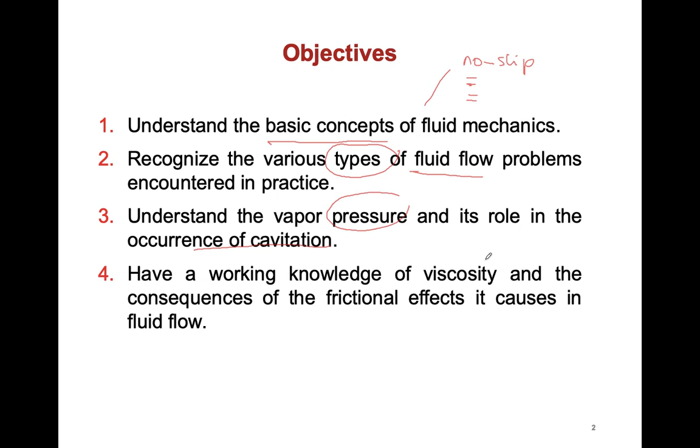So the first fundamental topic that we need to learn here is the no-slip condition. This is number 1, the fundamental concept. This no-slip condition is affected in experiments already done on an aerofoil or wing, aeroplane wing. This is what we call the cross sectional.

So to understand this, let's look here. We have one condition, or we form one situation where the flow here has the same velocity. So here all having the same velocity. But the velocity here actually has not reached the plate yet. After the velocity reaches the plate, the velocity before this, which was uniform or the same magnitude, will be having a different magnitude.

So at the bottom, the velocity will become 0 because of the no-slip condition. What is the no-slip condition? No-slip condition is we assume the fluid is having friction. If we assume it's a slip condition, that means the velocity here and the velocity here is the same, because in a slip condition, the particle nearest to the plate slips, meaning it's not having frictional effect.

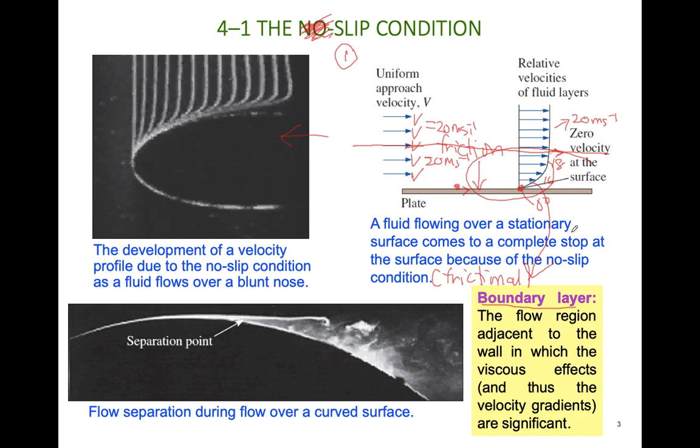Okay, so the second criteria or second fundamental knowledge in fluid mechanics is the viscous and inviscid region. This is what we call the extended explanation of the no-slip condition.

So if we see here, this is an effect from the slip condition, and this is an effect from the no-slip condition. Here we call this the same velocity from the mainstream.

So this is the viscosity effect, or we call it the viscous flow region. So if the velocity here is not affected by friction, we call it the inviscid flow region. If we look back here, viscous flow is where the frictional effects are significant. So here is the frictional effect, the flow affected by friction.

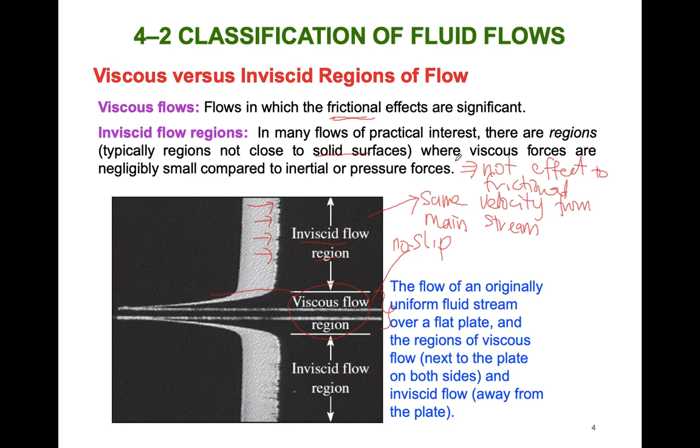Okay, so that is the second fundamental knowledge. So the third is the straightforward external and internal flow. External and internal flow, this one is straightforward. So internal flow, the flow will be completely bounded between the surfaces.

So if pipe flow comes here, this one is an internal flow, where the flow is bounded by the surface. This surface can be anything, can be square, can be anything, triangle. As long as the flow is bounded by the surface, we call it internal flow. And this one, external flow, is unbounded. For example, this one. This one we call external flow.

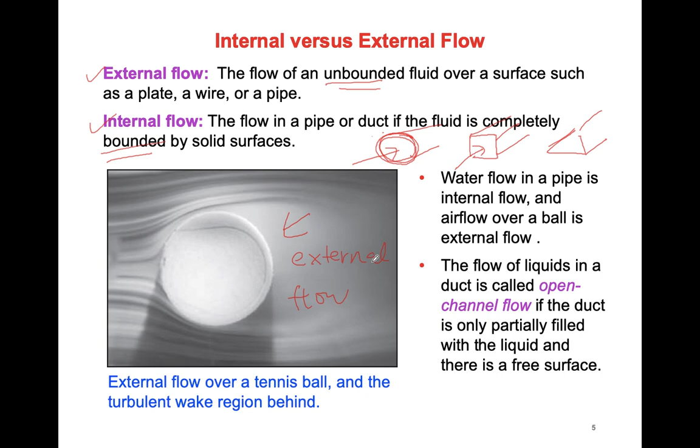Okay, so today we will learn more. Hari ini kita akan tengok lebih kepada definition. Sebab ini adalah main. Kalau you tak faham definition, that means you tak boleh nak understand the real situation nanti bila kita tengok chapter 6.

So this is compressible and incompressible flow. So incompressible means the density is constant. For compressible, the density is not constant. What does constant or not constant mean? So if we have the flow, and the velocity of the flow is, for example, 20 meters per second, we need to calculate what the Mach number is for 20 meters per second.

So here is the formula for Mach number. Speed of flow is 20, over speed of sound, this one you need to check. What is the speed of sound? Usually we can call it 300. So if we calculate here, the value is 0.2, for example. For incompressible flow, we suggest the condition is a Mach number of 0.3 and below.

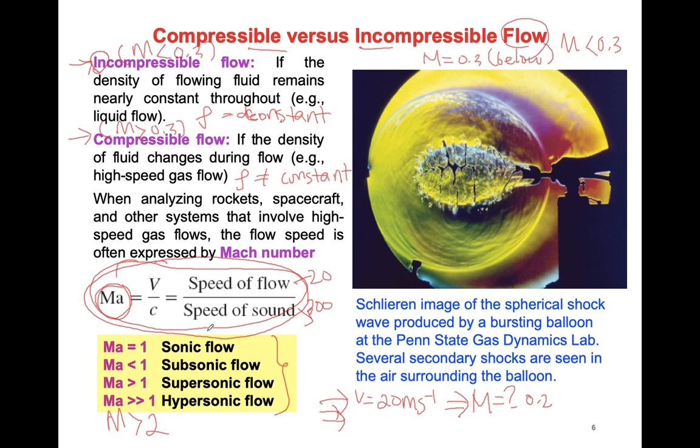This one is only the notation. So if Mach number equals 1, the flow is sonic flow. If Mach number is less than 1, the flow is subsonic flow. If Mach number is more than 1, the flow is supersonic flow. Usually, Mach number greater than 2 is hypersonic flow. Okay, this one is compressible and incompressible flow.

So the next fundamental is laminar and turbulent. What is laminar and what is turbulent? I think you had this in our experiment to determine laminar and turbulent. So laminar and turbulent are types of flow. If the flow is laminar, the definition is highly ordered fluid motion characterized by smooth layers of fluid. The flow of high viscosity fluids such as oil at low velocity is typically laminar. The main words here are motion characterized by smooth layers of fluid.

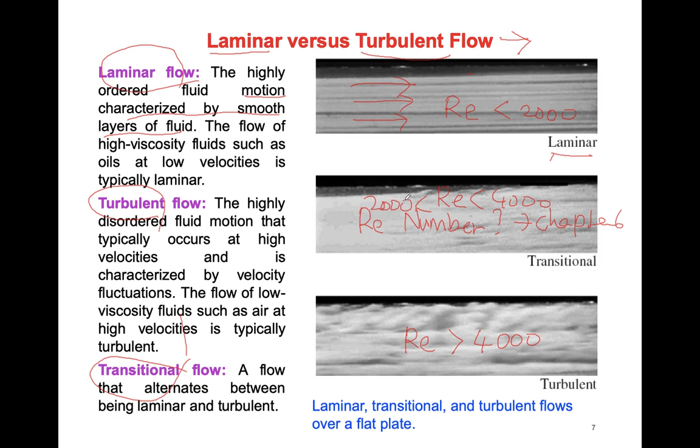So to characterize laminar, turbulent or transition, we have one formula, the Reynolds number. We will see the Reynolds number in detail in chapter 6. If we calculate the Reynolds number less than 2000, we call it laminar. If the Reynolds number is more than 4000, it is turbulent. For transitional, the Reynolds number is less than 4000 and more than 2000. This one we call transition.

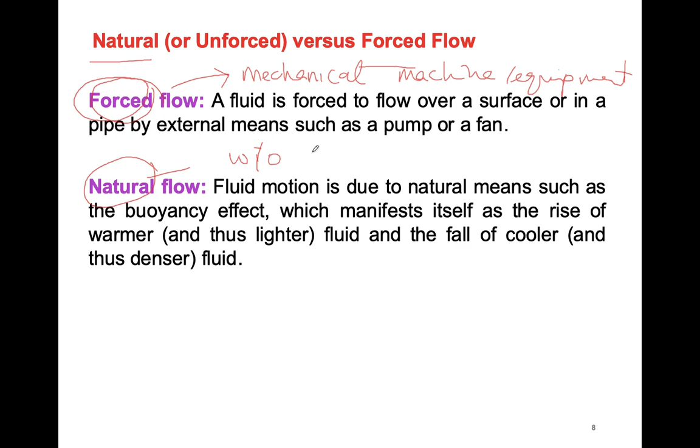So this one is straightforward also. We need to know the flow condition, either forced flow or natural flow. Forced flow is flow using a mechanical machine, mechanical pump, or mechanical equipment. Natural flow is without using mechanical equipment. So that's all. So if we blow, the condition is natural flow because it is not using mechanical equipment.

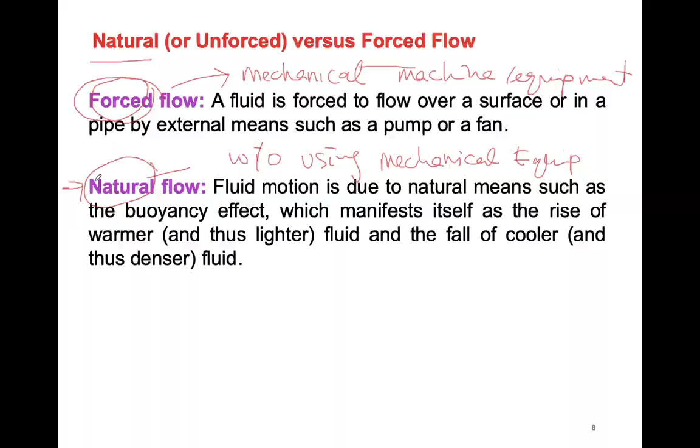Okay, so then the next fundamental here is a buoyancy effect. Here we need just to capture the force, fundamental force versus weight. Oh, you cannot see here. Okay, this one is the force versus weight.

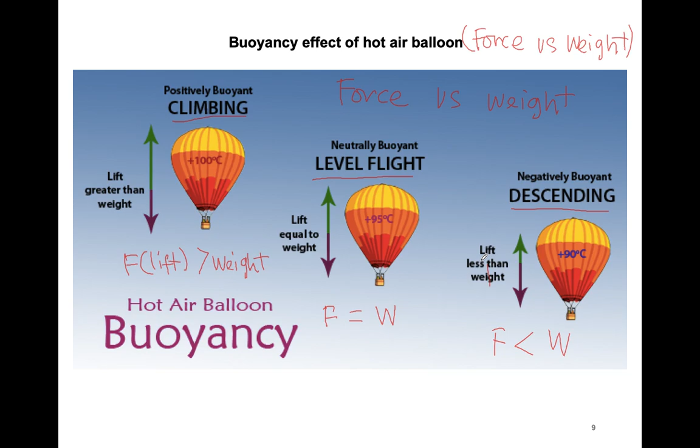Okay, so if the lift force is greater than weight, that will be the climbing condition. If the lift force is equal to the weight, that means level flight. If the force is less than weight, that means weight is much greater, there will be the descending condition. That's only the fundamental here.

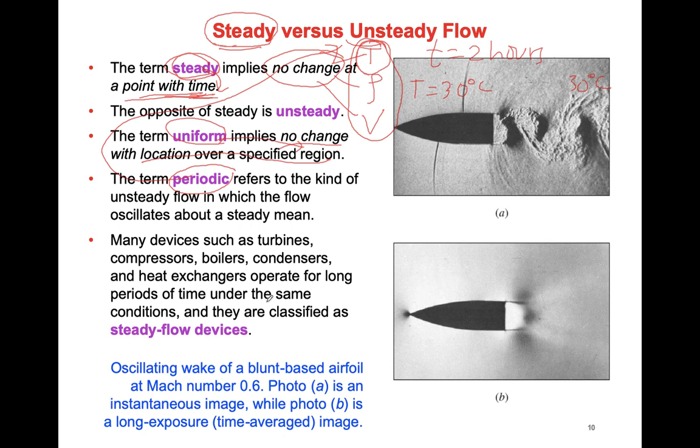Okay, periodic refers to a kind of unsteady flow, which means the flow oscillates about the steady mean. So this one is a subset of unsteady. Many devices such as turbines, compressors, boilers, condensers, heat exchangers operate for a long period under the same condition. So these devices we usually design as steady flow devices.

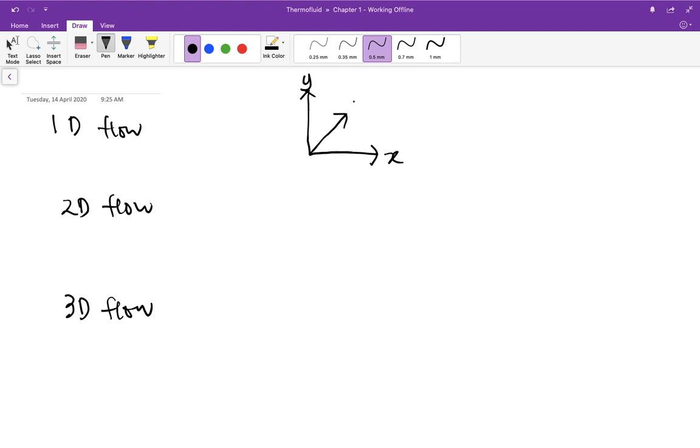So what is one-dimensional flow, what is two-dimensional flow and what is three-dimensional flow? Okay. Let's assume we have 3 axes. This is Y, this is X, this is Z. And then we have a mainstream velocity here, which we name V.

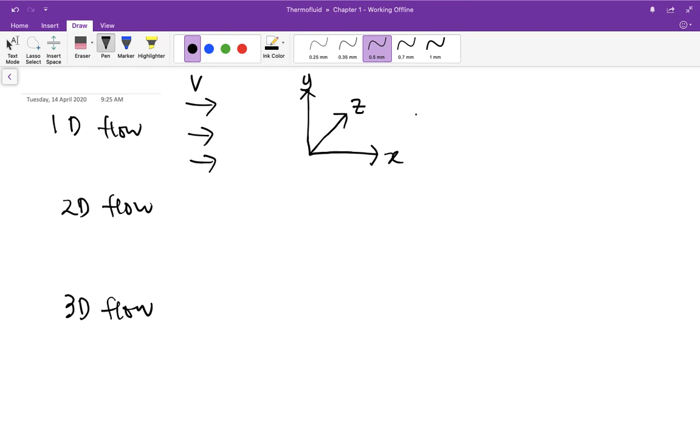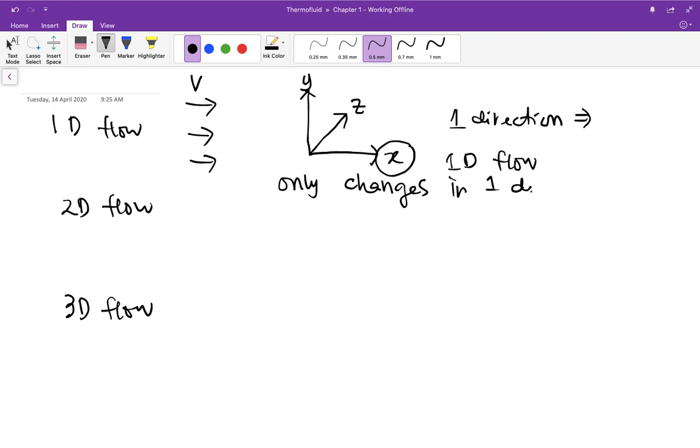Okay. So if the velocity here only changes in the X direction, or only in one direction, we call it 1D, one-dimensional flow. Same here, 2D flow only changes in two directions. Two directions can be anything: X and Y, Y and Z, or X and Z, but only two directions. So what happens in the other direction?

There is still flow. Okay, if we look at this, for example, it changes in two directions, X and Y only. What happens in the other direction? X and Y change, but the Z direction is uniform. Same here, for example, if only the X direction changes, Y and Z are uniform.

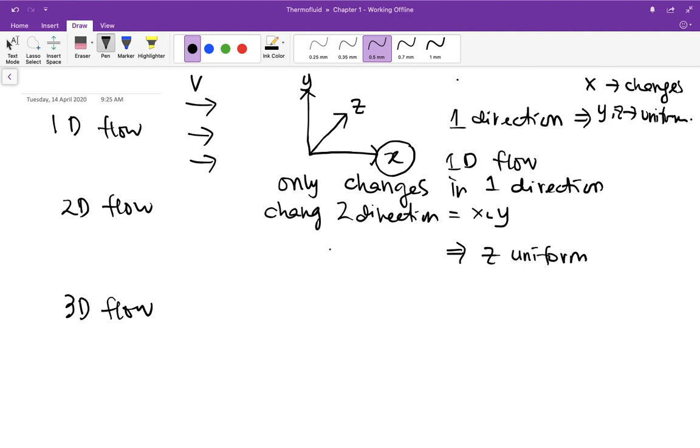Okay, for 3D flow, all have changes. That means X, Y, and Z all change. So you need to clearly understand what 1D flow, 2D flow, and 3D flow are.

Usually, to solve 3D flow we need to use CFD. It cannot be solved analytically. 2D we can also solve, but it consumes a lot of time. Usually for analytical work at undergraduate level we use 1D flow only. Especially at our engineering technology level, we will focus mostly on 1D flow. Okay.

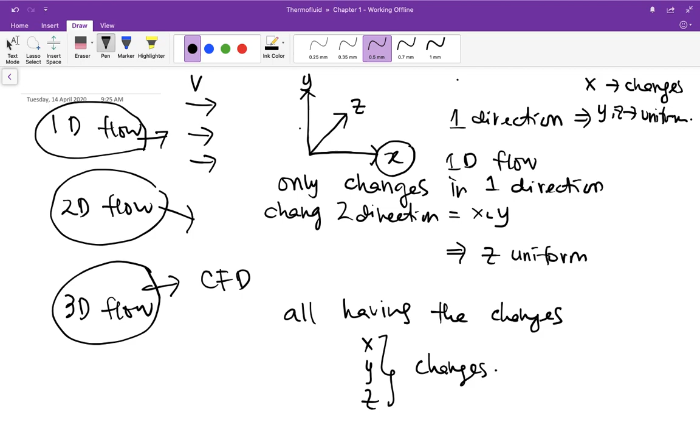Okay, so balik pada kat sini. So kalau kita tengok sini 1, 2 or 3 dimensional flow. A flow field is best characterized by its velocity distribution. The flow is 1, 2 or 3 dimensional if the flow velocity varies in 1, 2 or 3 dimensions respectively. However, the variation of the velocity in a certain direction can be small relative to the variation in other directions and can be ignored. So the variation, that means the changes.

The changes. Macam yang saya cakap tadi itulah, kalau for 1D only X direction changes. So X and Y, X and Z. However, if the variation is small, sometimes the variation can be ignored. So we assume it will be uniform. Okay. So itu adalah yang dikatakan dengan 1, 2 and 3 dimensional flow.

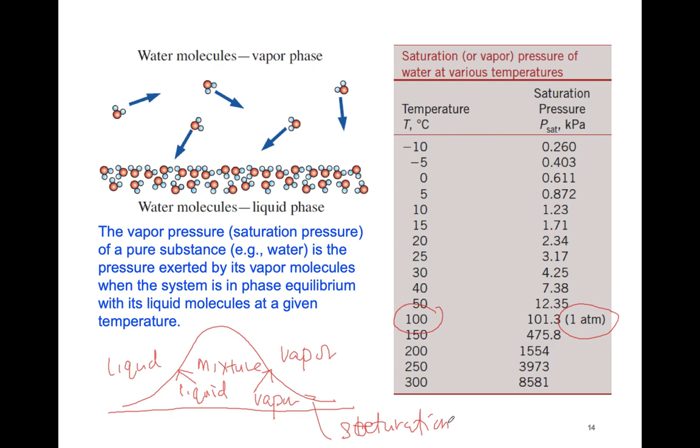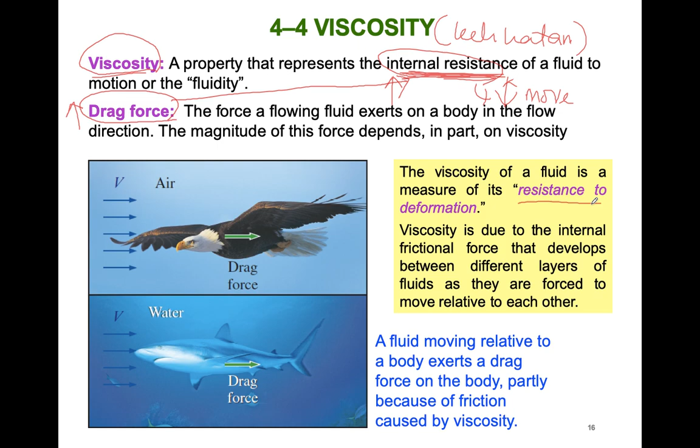So if viscosity is high, the drag force will also become very high, because the drag force is the resistance. The formula of the drag force is related to the resistance. So the viscosity of the fluid is the measure of the resistance to deformation. So here is the formula that you need to understand if you want to calculate the viscosity.

So viscosity actually berlaku pada condition Newtonian fluid. So formula ni valid sekiranya kita assume ni adalah Newtonian fluid. Apa itu Newtonian fluid? A fluid in which the rate of deformation is proportional to the shear stress. This is the characteristic we use to calculate the viscosity by assuming that the fluid is Newtonian. So here adalah main karakteristik yang kita guna untuk calculate the viscosity, the shear stress.

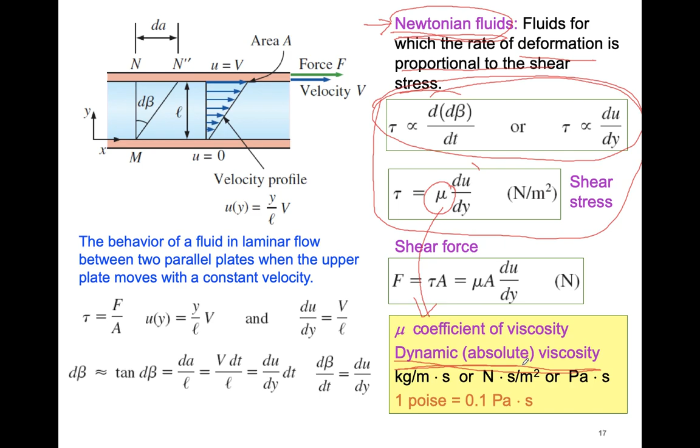So here is what we call the viscosity coefficient. So this one we call the dynamic viscosity. Sebenarnya viscosity ni kita ada dua condition. Kita ada dynamic viscosity and also kinematic viscosity. So what happens? Apa perbezaan dynamic and kinematic? So kat sini kalau kita tengok definition, for fluid,

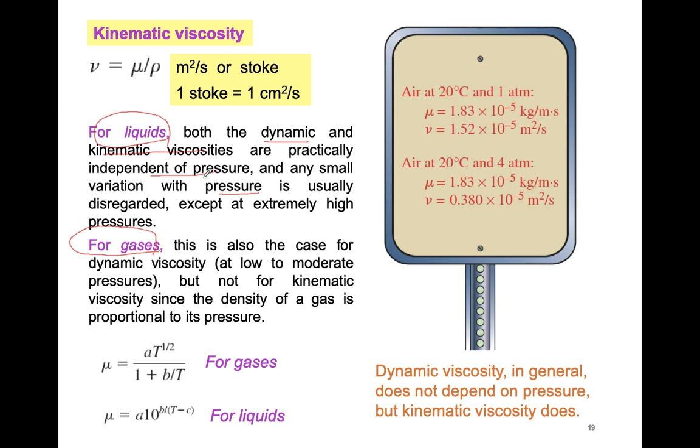dynamic and kinematic viscosity are practically independent of the pressure, and small variations in pressure are usually disregarded, except at extremely high pressure. But for gases, this is also the case for the dynamic viscosity, but not for the kinematic viscosity, since the density of the gas is proportional to the pressure. So that means in liquids, the dynamic viscosity and kinematic viscosity we can usually assume the same behavior, but for gases it will be different.

So here, this one we call the viscosity for the liquid and viscosity for the gases, and their variation with temperature. So if the temperature increases, the viscosity for the liquid will decrease, and for the gases it will increase.

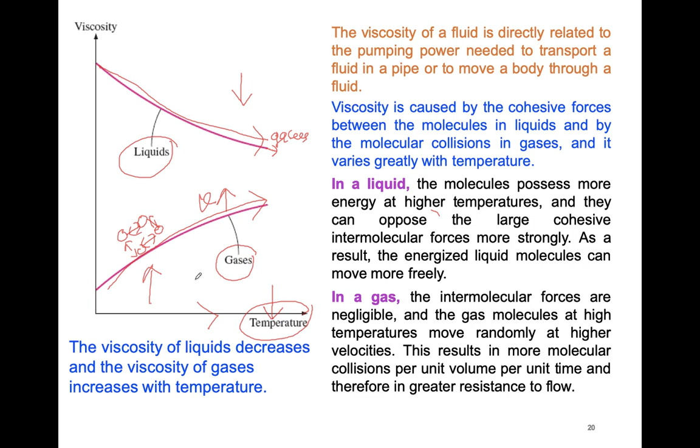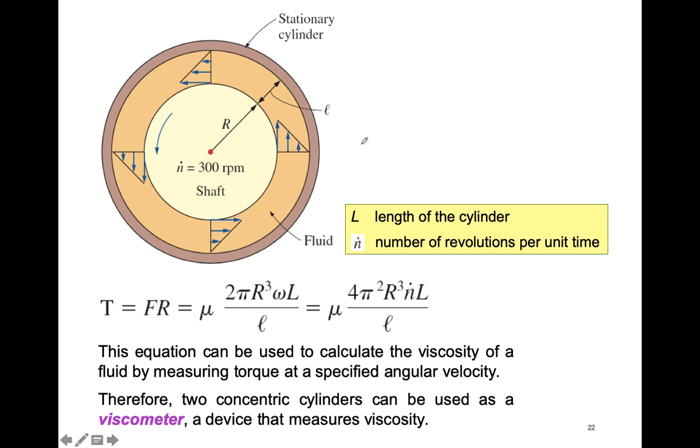So that is the topic covered today. We have seen the no slip condition: at the plate, the velocity is 0 because of friction. Then the classification of fluid flow: we have seen viscous and inviscid, and the layer, which is the same knowledge as the no slip condition. Internal and external flow is clear: if the flow is bounded, it is internal; if the flow is not bounded, we call it external.

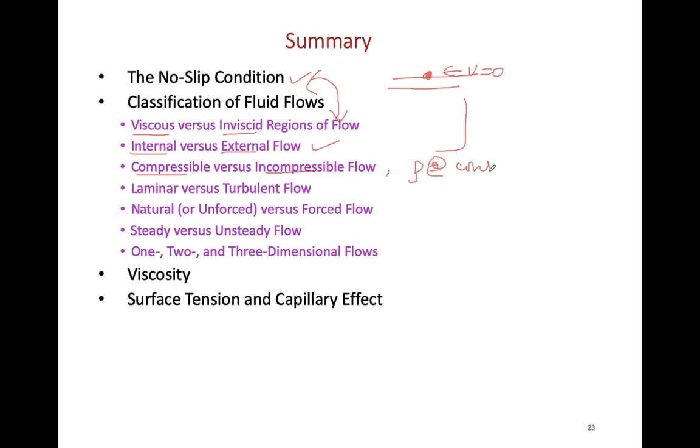Compressible and incompressible is regarding the density, whether the density is constant or not. How to judge? We need to calculate the Mach number. Laminar and turbulent, how to judge? By using the Reynolds number. Natural and forced: if the flow uses mechanical equipment like a pump, we call it forced flow; if not, it is natural flow. Steady and unsteady, how to judge? By time. If the flow changes with time, it is unsteady. If there is no change with time, we call it steady.

So 1, 2, 3 dimensional: in which axis the flow is changing. If it changes in only one axis, we call it one dimensional flow. If two axes change and the other axis is uniform, we call it two dimensional. And so on for three dimensional. Viscosity is the resistance in the fluid. This one I will skip for the MCQ because it will be covered later. Maybe we cover it in the report.